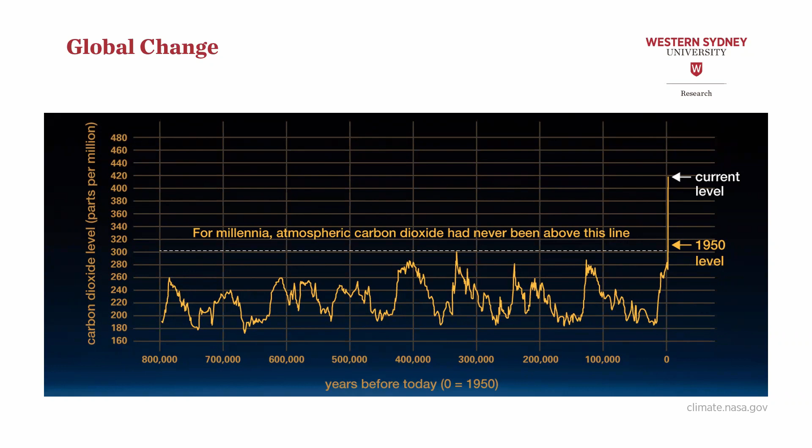Now, when we look at the Earth system itself, this is in acknowledgement of one of our greatest climate advocates in Australia that recently has very sadly died, Professor Will Steffen from Canberra. He was an absolute outstanding researcher in the field of climate change, particularly on a global scale.

This is a paper that he published in PNAS in 2018, and it shows you the Earth system pathways that, based on his knowledge and that of his colleagues, they trajected where we're heading. You may have heard the term climate cliff, that we're close to the cliff. Well, this depicts the cliff. You see the glacial or interglacial times in the very back, where you have cooler temperatures, warmer temperatures interchanging, and you travel through time where you have your interglacials that are warmer, then your glacial periods that are cooler, and Earth would have just bounced in this half pipe from one end to the other.

Now, with the start of the Anthropocene, and particularly the last 200, 250 years, we started to see a warming of the planet since the beginning of the Industrial Revolution. With the increasing emissions produced by burning fossil fuels, we are now pushing the Earth system into a warmer state. This warmer state means we're getting to what is indicated here, a planetary threshold.

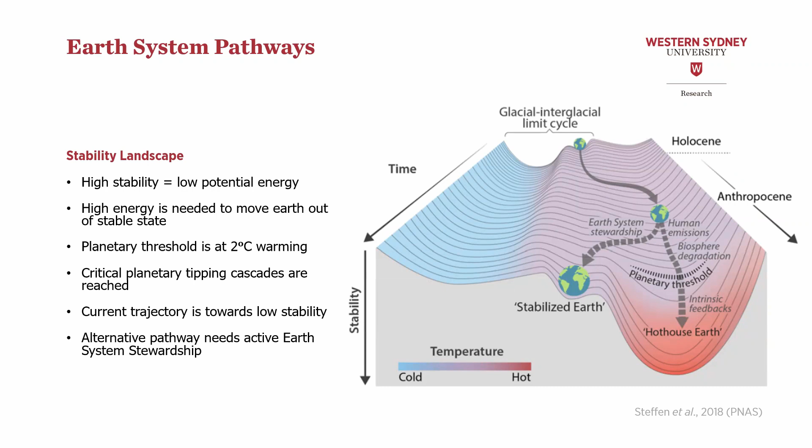Professor Steffen also in this paper talks about tipping cascades, and this is something we need to understand when we talk about planet Earth and where we're heading. Once, like a domino game, once you start tipping one stone, there are chain reactions that are sometimes even accelerating the decline or the speed towards the next tipping point.

This graphic shows you that these tipping points are temperature related. These temperatures that you see here in yellow, 1 to 3 degrees, in orange, 3 to 5, and then above 5 degrees - these are surface temperatures of the planet. So if we have a surface temperature warming here in Australia currently of about 1.5 degrees, we are getting very much into the areas of these yellow tipping points, of these cascades.

We can already see, when you look at Australia in the map, coral reefs were indicated 2018. In 2019 and 2020, we had mass bleaching in the coral reefs - 80% or even more than 80% are currently damaged or dead. The United Nations, or UNESCO, is thinking of changing the World Heritage status of the reef because of that. So there are already signs that these tipping points are reached or even surpassed. We know that this year is the lowest measurement of Arctic ice and also of the Antarctic ice shield. So there are definitely indicators out there that show us the yellow tipping points may have already been reached.

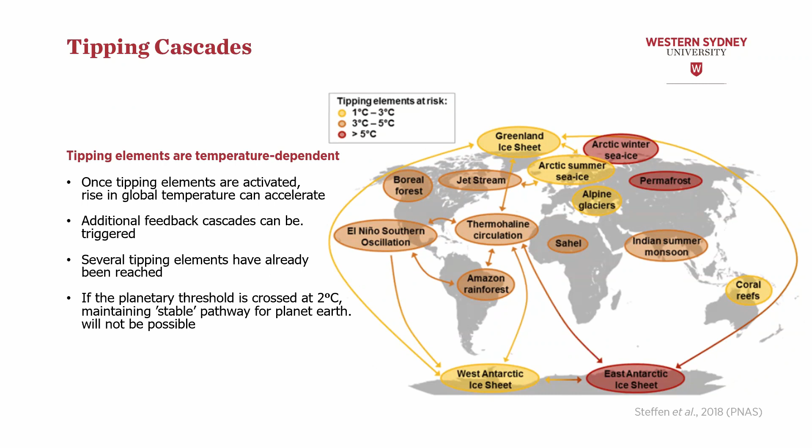You can see with the arrows reaching out to other tipping points, particularly the thermohaline circulation, which is the ocean circulation belt that goes all around the world with cold water, warm water, high salinity, low salinity mixing. There are effects from the melting waters of the Arctic and Antarctic shields that influence how these ocean belts circulate, and therefore the climate that we experience is starting to change. These are global impacts from our activity.

Now let's have a look at Australia and how Australia is doing to counter these very scary effects. Well, the data tells us we're not doing really well in Australia. I won't go through the list.

You can read through the list here, but we are the last of 64 countries for national and international climate policy, and I guess that's also owed to the past 10 years under the previous government, that there was no real progress. Just look at the last point that I list here.

This is from the Earth Overshoot Day. When all Australians would live a lifestyle like we currently do, we would need 4 planet Earths and their resources to actually sustain that kind of lifestyle.

It also means that over time, the graph on your right-hand side shows you the carrying capacity, really, biocapacity of Australia. You can see that the ecological footprint didn't really change over the past 50, 60 years, but our biocapacity has declined in this country. We're depleting the resources that we have available. And that means that our ratio for the biocapacity reserve plus or minus the deficit is getting worse.

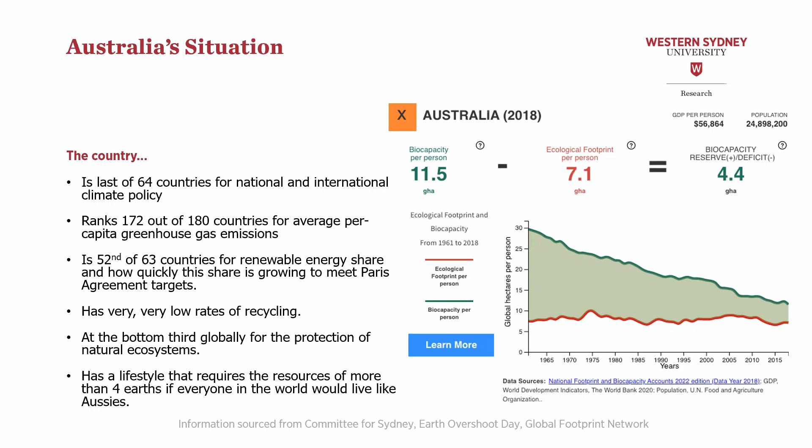When we look at Sydney, scaling further down to Sydney, we can see that Sydney itself as a city is a very high CO2 emitter, and it also does produce relatively small amounts of renewables as well.

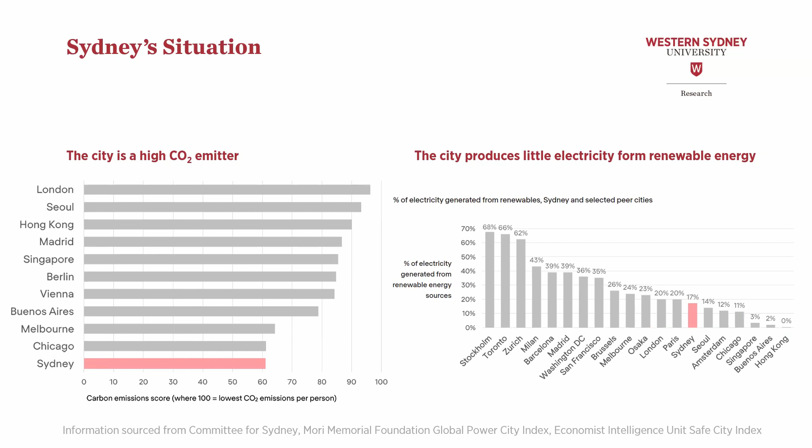Other things that Sydney is not really good at, we know that water recycling, for example, has a very low percentage in the water use across the city. There are other indicators that Sydney itself is not doing really well in this space to contribute positively to global effects from human activity.

Now, as I said at the beginning, I don't want to leave the room depressed, or on your screens to finish this seminar and think that doom and gloom is upon us. We at the university here at Western, we take this very seriously, and we really work for empowering the community.

Part of the mission, it's basically in our constitution for the university, part of the mission of the university is to work in our research for the local communities. We're only one of 2 universities in Australia that have that written into their constitution.

Because of this approach to community and to work with community and for community, we are very good for several years now in working towards the Sustainable Development Goals. Our Vice-Chancellor, Professor Barney Glover, has signed up to the SDGs very early. We were one of the very early universities that signed up to work towards the Sustainable Development Goals of the United Nations.

And last year, as a result of all our collective efforts within teaching, research, within operations of the university, buildings, and so on, we reached the #1 status of 1,406 universities globally that were assessed for their contribution towards the Sustainable Development Goals. We came out as #1. As a relatively young university, this is a fantastic result, which we are really, really proud of.

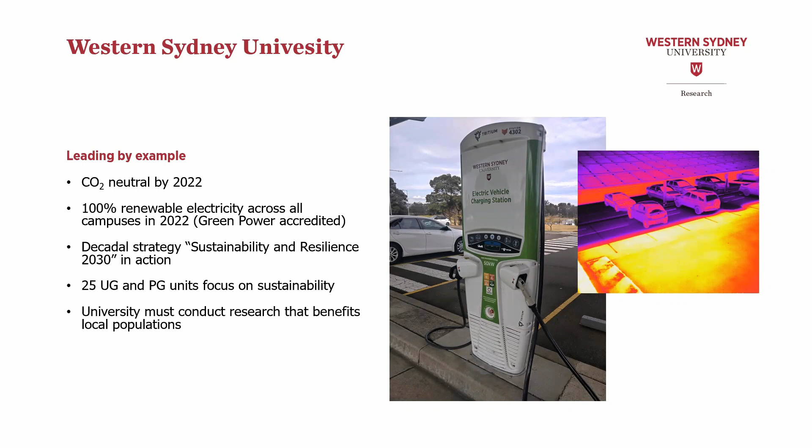Lastly, I want to say that not only do I feel proud being able to work on Darug land and having the permit or the permission to do my work on land that was never ceded, we have recently been awarded nearly $80 million to build the first indigenous center of excellence in Parramatta.

On Parramatta South Campus, which is a fantastic outcome of our new, or relatively new, Deputy Vice Chancellor for Indigenous Leadership. It's one of the first leadership positions in the university administrative system in Australia that absolutely focuses laser sharp on Indigenous support.

We have a lot of additional underlying support for our Indigenous students, including special lectures, the Badanami centers. We have lots of programs for children. The Pathways to Dreaming or the Heartbeat program are only a few examples. So we're really taking it very seriously to be there for the community, and also look at the largest Aboriginal and Torres Strait Islander population here in Western Sydney for all of Australia.

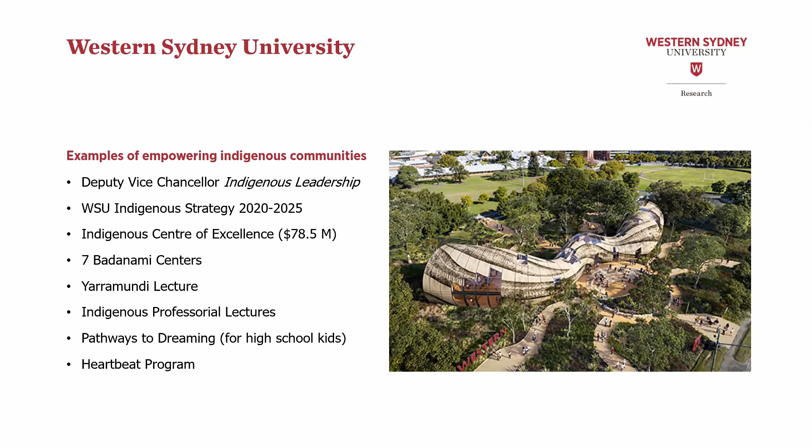This is where most of the Aboriginal people still live today, and we are taking it reasonably, with a high responsibility to help these people achieve greater learning outcomes and therefore have greater prospects for their work life.

Now let's get to cities. Why are they overheating? The IPCC, in their latest report released in 2021, for the first time created a separate section for urban areas. That was the first recognition of the importance of cities to climate change effects on a larger scale. As stated in their regional fact sheet for cities, urbanization has exacerbated changes in temperature extremes in cities, particularly for nighttime extremes. We can see that in Western Sydney, where we sometimes have nighttime temperatures above 30, even above 35 degrees, which is very, very stressful on the human body. The urban heat island effect is further amplified in cities that lack vegetation and water bodies. So these two impacts really summarize why our cities are overheating.

To further picture what it means for cities and development, there's a very nice graphic in this fact sheet where you can see that geometry, human activities, and heat retaining properties are highlighted as elements in cities that contribute to warming. The statement at the end says cities are lacking blue and green infrastructure, which is of course our cooling infrastructure. This image shows that water and vegetation are the only elements that can cool at a whole-of-city or metropolitan scale.

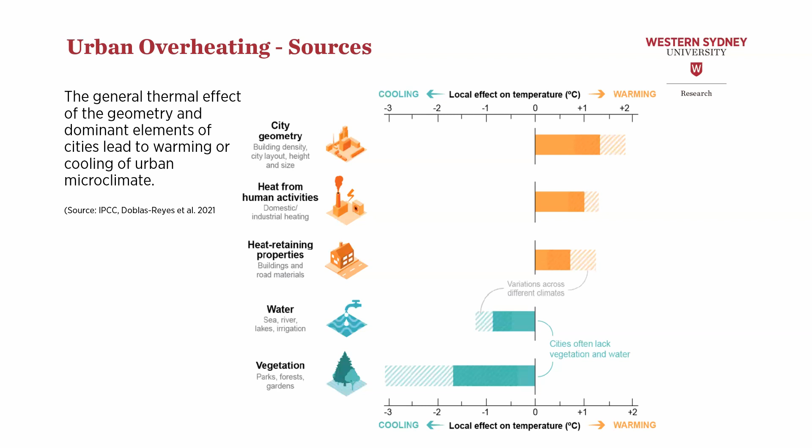I want to highlight urban heat and with it the urban heat island effect. This is an example of Paris. What you see in these images is Paris from the sky, satellite imagery. We're looking at a day in summer in 3-hour increments, starting at 1 to 4 o'clock in the night, going from top left to top right, then starting in the second row. You can see that the first two graphs in the top row are still during the night, showing a very pronounced urban heat island effect. The urban core of Paris is much, much warmer than the surrounding, mostly vegetated area. There's quite a bit of forest around Paris as well.

As the sun goes up, looking at the very right, 9 to 12, and then bottom left, 12 to 3 o'clock in the afternoon, it becomes very heterogeneous. So the urban heat island effect starts to wash out because of the different thermal properties of materials within the city throughout the landscape, which means heat is not only staying in the city but can also be quite warm around the city. When you have, for example, a field that was just recently plowed, with bare earth exposed to direct sunshine, it becomes really warm.

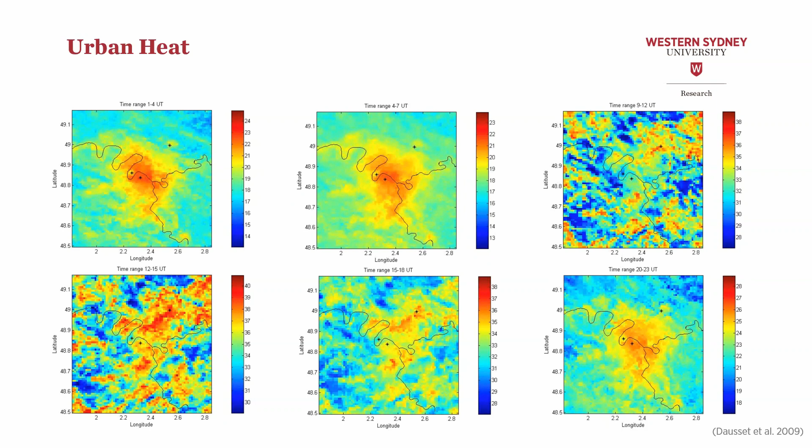So surface temperatures can also rise in the surrounding area. But when you look at the scale on the right side of each graph, during the night it runs from 14 to 24 degrees, or 13 to 23 in the very early morning hours. In the afternoon, bottom left, it's from 30 to 40 degrees. So we're seeing much greater heat loads, but more distributed in a heterogeneous way. Lots of people think the urban heat island effect just happens all the time, but it's most pronounced during the night, and that's why it's so important that the IPCC has stated that hot nights are on the increase, with very high expectancy for more hot nights. This is where the urban heat island effect kicks in and causes us a lot of problems related to public health.

When we think about what happens in cities, I think this image explains it very clearly, because what we do is change land use from vegetated open surfaces to closed surfaces, anything from streets to driveways, walkways, houses, that lead to heat. Simple as that. The problem is that we're changing the thermal capacity of a landscape.

On the right, you see vegetation cover compared to a master planned community in Western Sydney. The vegetation not only transpires and therefore provides air cooling, it also has a relatively low thermal mass. That means it exchanges heat very quickly, and because it transpires and has water available, it stays cool. Surface temperatures are much, much lower.

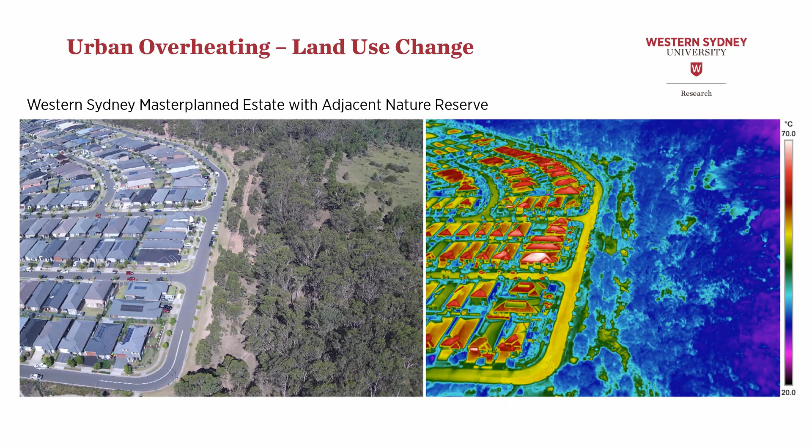Once you start introducing hard materials from roads to buildings, you can see how surface temperatures increase tremendously. And that, of course, warms the air, which means not only is your house warm, but also your neighborhood is warm. And that's where, at this scale, we need to start thinking of how can we reduce this warming or even eliminate it completely.

One of the really big culprits in my work that I find time and time again are unshaded car parks, covered by bitumen without any shade. As you can see here, this is the new Sydney Zoo near the Lighthorse interchange at Eastern Creek. It is a micro-urban heat island in itself. My measurements show that the nighttime temperatures around this car park are higher compared to the nearby Eastern Creek nature areas, which has effects on ecological food chains, on habitat quality, and so on.

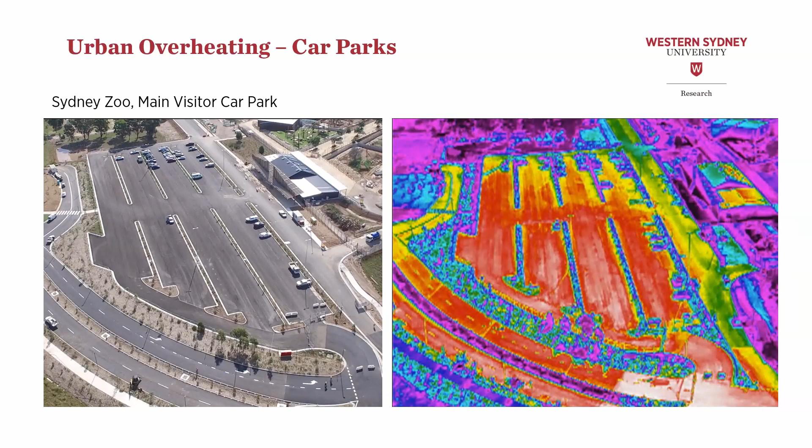This is a continuous problem we see across all of Western Sydney, where we found about 6 square kilometers of unshaded black car parks. Think about how many football stadiums without anything else that is just black, soaking up the energy from the sun and re-radiating that into the night.

I won't go too deep here, but just as an indicator for what really happens physically with those kinds of surfaces, and the same would apply to streets and buildings, you're dealing with incoming shortwave and longwave radiation that gets absorbed by surfaces and gets stored. It depends on whether you're looking at these energy equations during the day or during the night. Energy has to go somewhere.

In the case of those hard surfaces, the energy from the sun is transferred into energy you can feel, the sensible heat flux. So if you walk over a hard surface that had a lot of sun exposure during the day, you will feel radiant heat coming off that makes you feel warmer. You can feel that on your skin. This is basically captured in this diagram that shows the heat fluxes and energy fluxes that lead to warming the atmosphere above those surfaces.

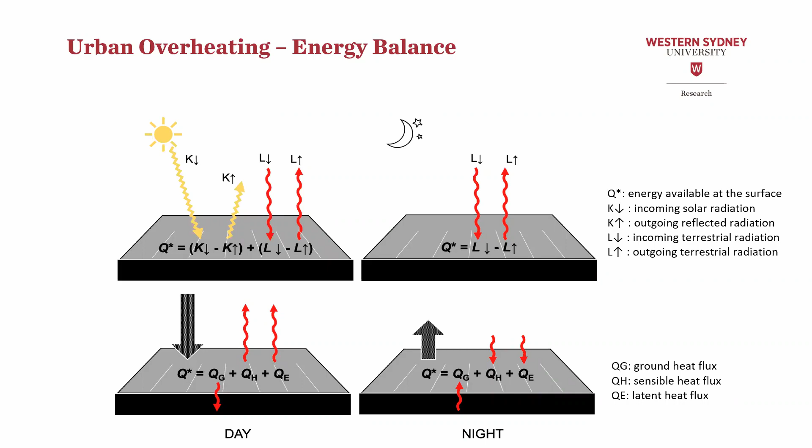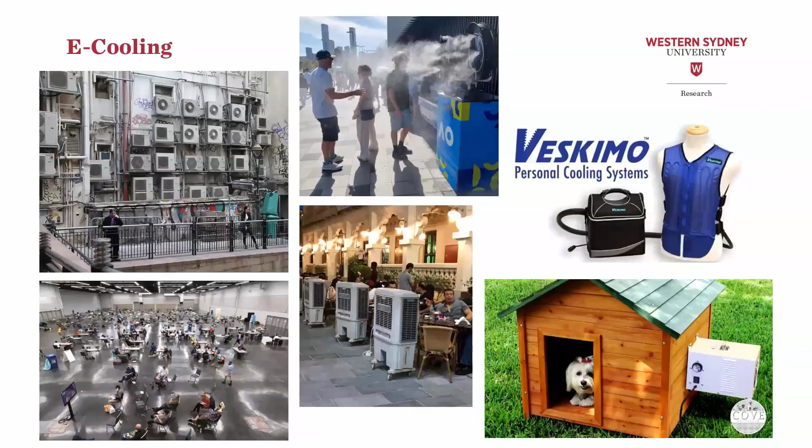So now, how can we change these heat characteristics of materials, of places? Of course, we can do what I call e-cooling, electricity. Just use electricity to cool things down. We can cool indoor spaces. There are lots of applications, and we saw it recently in these tremendous super heat dome effects in North America and southern Canada.

Suddenly cooling centers were popping up everywhere because people were not equipped at home with air conditioning. You can see in the top left a building retrofitted with air conditioning system after air conditioning system. This is what's happening at the moment in Southeast Asia too, which of course has a lot of climate implications in the long run.

At the bottom left, you can see one of those cooling centers, and we trialed one in Blacktown so far. But if we ever experience similar conditions to those in North America and southern Canada, we don't have this kind of infrastructure in Sydney. So what do we do? Where do the people go that don't have air conditioning at home? Or what happens when we have blackouts because the electricity grid is at capacity and pushed beyond because everyone switches their air conditioning systems on?

There are solutions. This was a recent picture given to me by a friend who visited the Australian Open, where you had misting apparatuses where people can actually get cooled in the summer heat.

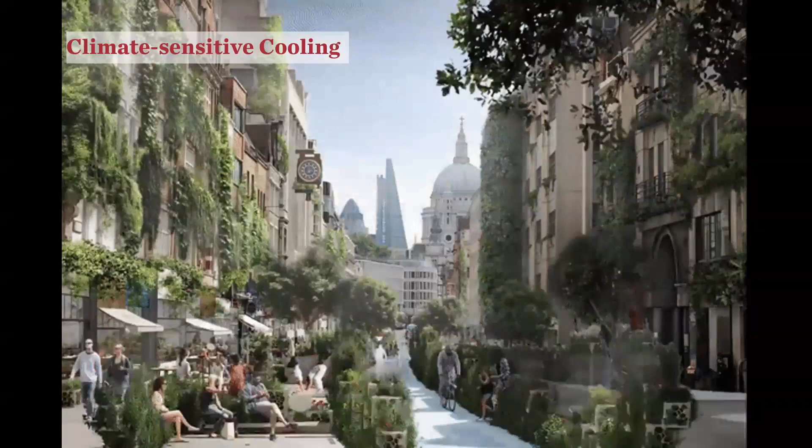This is much more what we want. We want climate sensitive cooling. You can see in this little animation, it's green facades, it's pocket parks, it's taking away streets, or even if you leave streets there for active transport, you put some cool paving out so that you have reflective surfaces that stay cooler. There are lots of things we can do. Of course, this is wishful thinking because it doesn't happen as quick as we see here, but I think it's much more reasonable to approach our cities in a way where we take climate sensitivity into account and try to use green infrastructure and blue infrastructure to cool them down.

Well, if we want to have green infrastructure, then we have a problem because, as signified here on the left-hand side, trees grow slow. If we plant trees today, they probably give us some kind of cooling in 20 years that is meaningful, but we will have hot summers in between. What do we do? Also, the graph on the left-hand side shows you that trees, even if you plant the same species, will grow differently in different places. So in some places, they may grow slower than in others. We find places in Sydney where we can't even grow trees because you have all the underground services or you have the overhead power lines.

How do you grow a tree there with meaningful canopy over time? And then this is on the right-hand side in that graph. Then we have a problem about over-promising and under-delivering when we get to tree cooling. When we empirically measure how much tree canopy cover gives us how much cooling, we can see in the bottom two lines that we get maybe 0.1 degree per 10% canopy increase, maybe up to 1/4 of a degree for 10% canopy increase. By the way, Sydney is aiming for 40% canopy cover. So there are limits, and we can't just promise, hey, we make the city green and then everything is cool.

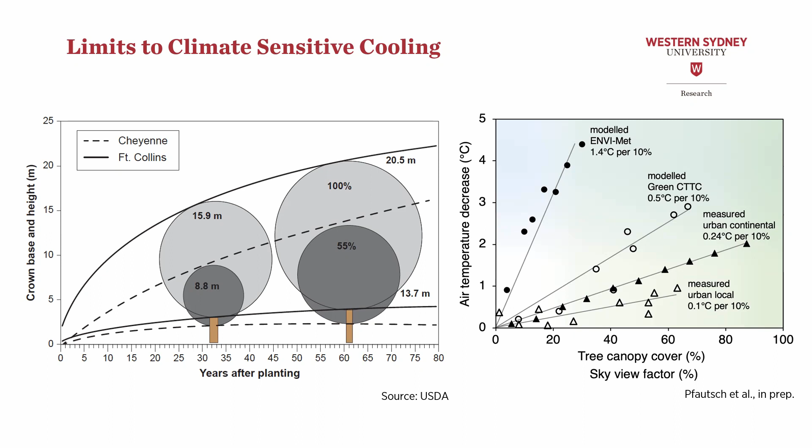That's not the case. When we use models, there's this problem of over-promising depending on the input parameters into your models, where you can see if we use ENVI-Met, a widely used urban climate model, you get 1.4 degrees per 10% increase in canopy cover. Very unrealistic. We've never ever measured that in the real world. So there are problems when people start to use ENVI-Met and set up policies around what we want to achieve and say, hey, we get 3-degree cooling by increasing canopy cover by 20%. Let's do that. We doubt that this will actually happen.

What we do instead is we provide alternatives. This is part of the research I'm doing here in Western Sydney and also in Eastern Sydney, where we look at other alternatives and provide recommendations from playgrounds to schools to light rail transport. A few of those reports are out there. Feel free to take them with you to see how we are communicating our research.

We always put actions, recommendations, cheat sheets or crib sheets in there. So if you're a busy policymaker or a director of a program, you don't need to read the 60-page report. Go to the crib sheet or the cheat sheet at the beginning, get the key points, and then inform your co-workers about the really important changes that need to start happening. We're trying to bypass these long processes by going out, doing the empirical research, and then providing these recommendations that are realistic and can be implemented.

This was in one of the reports, a very interesting image about roof color. Probably a few of you out there in the Zoom world have heard me talking about black roofs and how much I despise them because they're really, really unnecessary. Now, this image shows you why I do this. You can see the black roofs in the foreground on the left have the hottest surface temperatures. Once you look further back into this little street block, there are some beige and white colored roofs. They are about half of the temperature, which also means the surface heat from those roofs will not radiate into your house, will not increase your air conditioning needs.

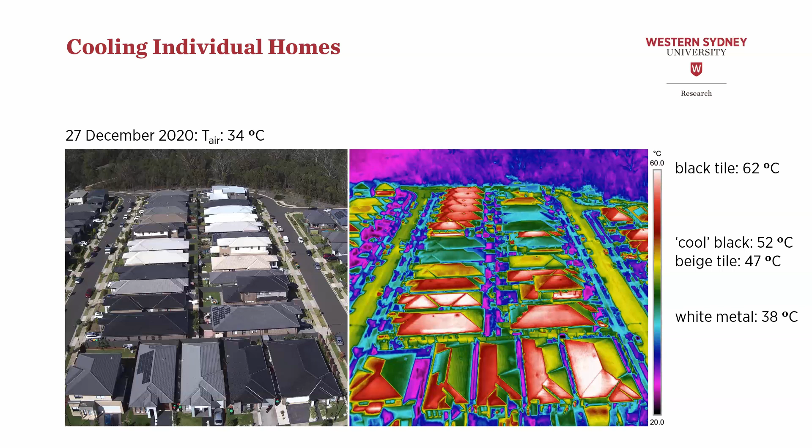If you build a home, you need a roof anyway, so why not put a beige one on? In some councils, you're not even allowed to do that. For example, the Northern Beaches wants your building to blend into the bushland character of the council, so you're not allowed to have a beige roof. To me that makes very little sense. From a design and aesthetics perspective, maybe it makes sense, and that's probably where the decision came from. But when we want to achieve citywide cooling and reduce heat across our city, we need to get into these kinds of design applications that we can change.

Here's another one, a similar situation in a master plan community. You can see the original view and then the infrared view. I want to point out this building, second from the right, has AstroTurf, synthetic turf, in the front garden, replacing the natural turf. You can see how much hotter it is—it gets into the reds and even whites, about 60 to 65 degrees, while the air temperature was 25 degrees where I was. Very, very hot material. It makes no sense, because as you can see in the image, the highest heat load of that material is right at the house, meaning the front of the house gets nice and warm just because of this material.

You can also see that driveways painted in different shades of gray and even black have much higher temperatures than the one on the very left, which was left natural in this very light concrete color. It's very fashionable, and I don't understand why—it probably matches the black roof nicely. It's fashionable to paint your driveway in dark colors, but that increases the heat load in front of your home. You can also see that the selection of garage door color again brings heat into your house or keeps heat outside. These are simple design choices when you assemble your new home.

You can just say, hey, I want a white colored garage door. It doesn't cost you anything more or less than the brown one, but it will cost you less in electricity use for air conditioning in summer.

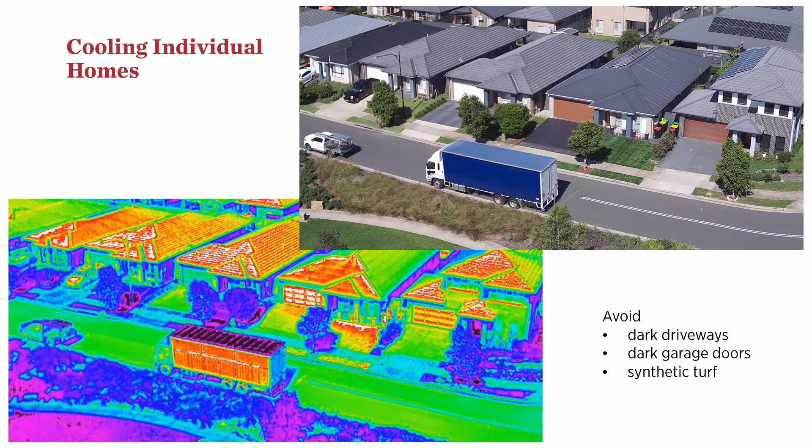We also went to playgrounds. By the way, how am I doing with time? Thirty-five? That's good. Yep.

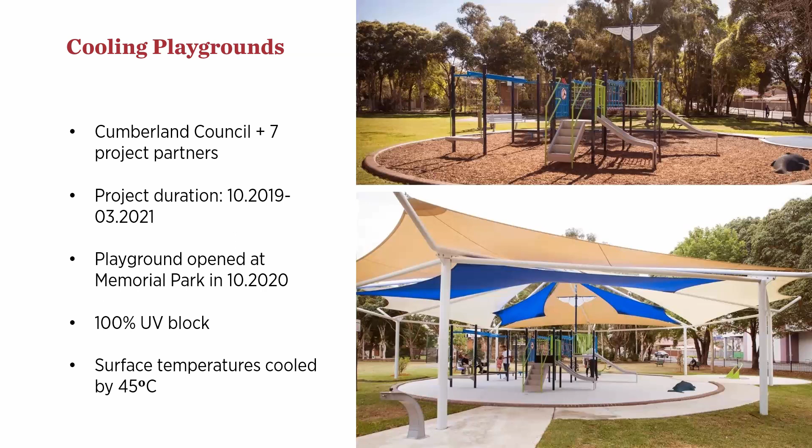It was a very successful project. I was there not too long ago, around Christmas, and we did some filming there. It was packed all the time - people love it, they absolutely took it on. I talked to people there, and they remember how it was before, when over the Christmas, New Year's break and into the school holidays, they couldn't go there during the day because it was just too hot. Now they're having a new playground that they can actually use.

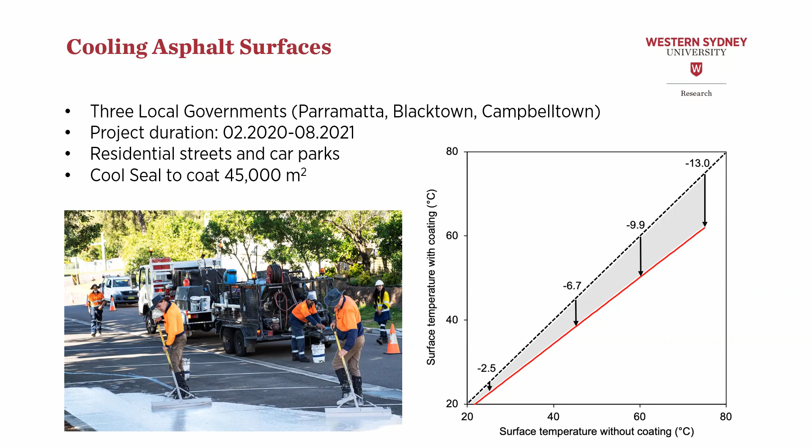That's what we're currently doing at Bicentennial Park - changing the whole park into a natural air conditioning system, where we provide the coolest possible conditions inside the park and around it by changing the irrigation system from human operations into AI. The AI is helping us condition the entire park - about 200 different zones - to have optimal hydration status, meaning all plants can transpire freely at maximum rates when it's hot, instead of shutting down and preserving water. That means we get the highest air cooling out of the park.

It's a very nice project, and we're really proud of what we're achieving here. It will run a few more months, and then hopefully for the next 5 years, Sydney Olympic Park Authority, together with some subcontractors, will continue operating the system. So it's embedded into the urban fabric for the people of Sydney Olympic Park to enjoy. You can go online right now and check where the coolest and hottest spots are in the park - all that data is live streaming. It's a very exciting project.

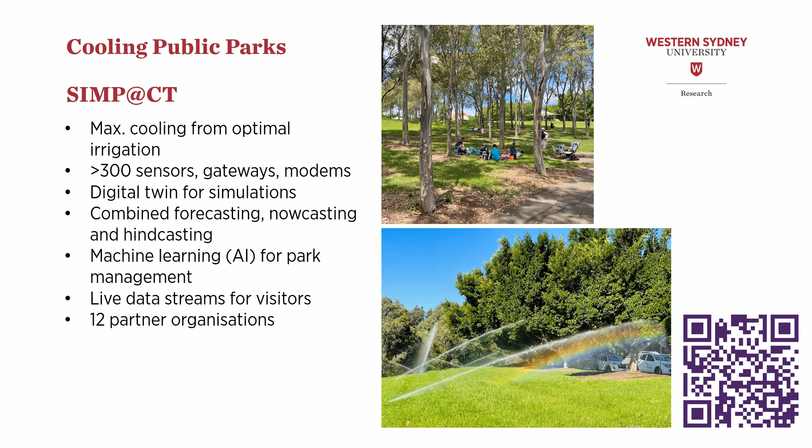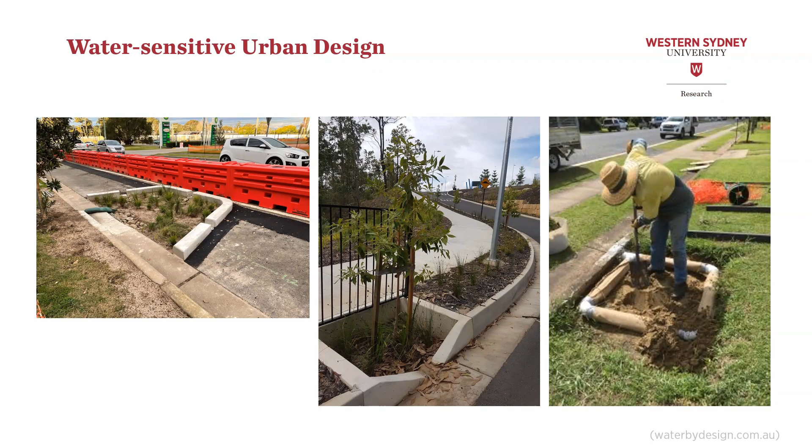That helps particularly with newly planted trees, where often local governments don't have the capacity to run around with a water tanker putting water out all the time. Here you can actually rely on stormwater infiltration.

I want to acknowledge that my colleagues are doing really great work too - it's not just me, there are quite a few people out there. This is happening at a global scale - there are reports from the World Bank and the United Nations Environment Program, as well as documents from colleagues in universities. UNSW is very strong here in Sydney, and very good work is also done by the Western Sydney Regional Organization of Councils. They're doing groundbreaking work in urban cooling and how we can get to cooler suburbs.

So what can we do today? I'll run through this quickly. I come back to Paris, because I showed you the urban heat island map for Paris. Paris has done something that is absolutely mind-boggling.

It's probably the largest urban cooling system in the world. Currently, they have about 90 kilometers of underground pipes where they use water from the Seine for heat exchange, taking up heat from air that's pushed through the system. The warmed water is put back into the Seine. This saves many hundreds of thousands of tons of CO2 emissions because they don't need to run air conditioning systems. Just think of a picture of Paris.

There are lots and lots of heritage buildings. You can't put air conditioning on these buildings like I showed you from Southeast Asia. It's just illegal, you can't do it. Also the structure may not actually carry the air conditioning system, so they needed to come up with something else. In the early 90s they started to develop this system and are now expanding it. By 2040 they want to have more than 1,000 buildings cooled by this system.

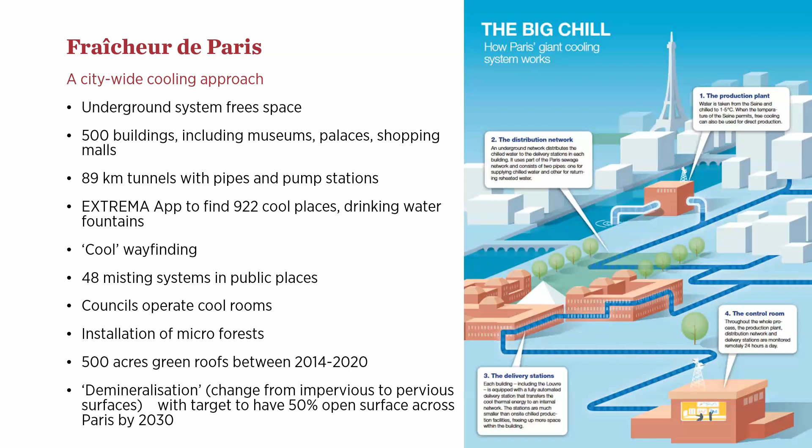Interestingly, the city of Sydney also joined Resilient Cities, a global program by the Rockefeller Foundation. Sydney does great work in this space, but Paris has gone much further since joining this global program. There are cool rooms everywhere. They have increased the coverage of green roofs, and the programs around demineralization are really interesting, where they rip up impervious surface and put back pervious surface for rainwater to be absorbed, which helps hydrate plants and reduce stormwater runoff. So they're doing a lot - there are some really great things happening in Paris.

We have examples here from Germany of how you can build a cool suburb. That's 20 years ago - triple glazing and solar was compulsory there. That's 20 years ago. When you want your home approved and use BASIX to get DA approval from council, you still get away with single glazing here in Sydney today. It makes no sense, it absolutely makes no sense. And the cost from single to double glazing is not that big.

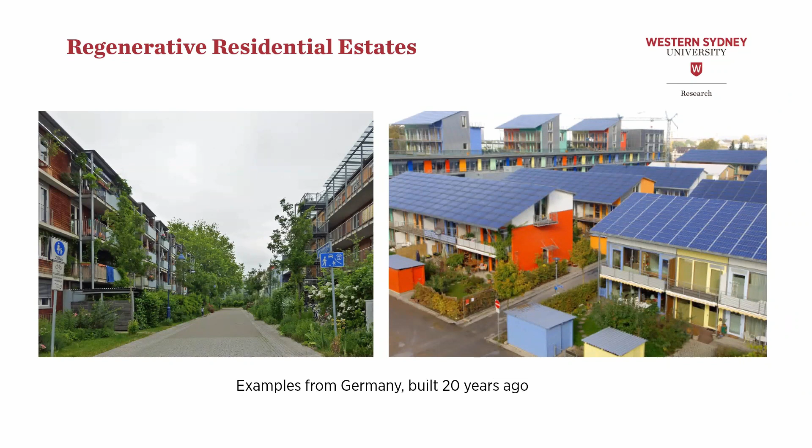We try. This is Fairwater in Blacktown, one of the settlements I learned about, where some very interesting concepts were implemented and trialed. Frasers Property developed this settlement for more than 1,000 residents. They are hooked up to a geothermal cooling system, so they're not using electricity for air cooling as we would normally do with a reverse-cycle aircon.

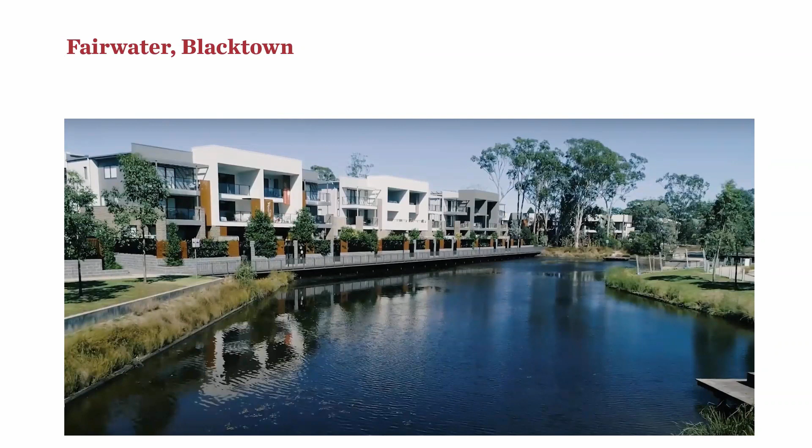They have parklands - you can see that mature trees were incorporated into the landscaping. They created new wetlands, combining blue and green infrastructure. They say 80% of the people living there are now more happy and satisfied with how they live than where they lived before. So it has an impact on the quality of life of the people there. There's community, people are outdoors, it seems to be a very nice place. It's a good example of where in Sydney we actually do something well.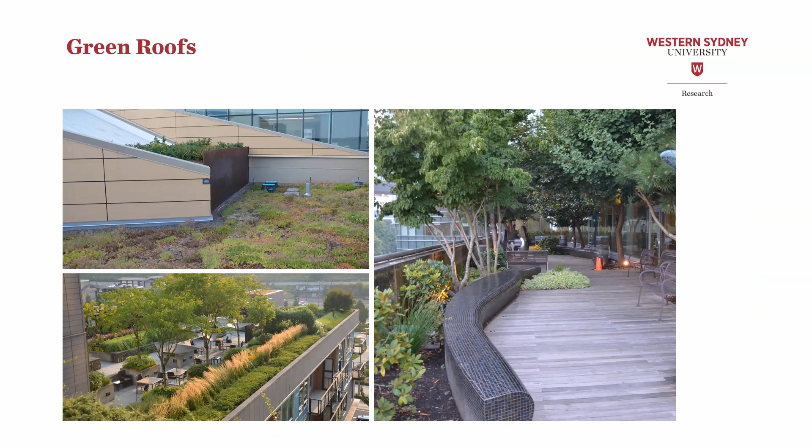We could do better with rooftops. There are extensive and intensive rooftop gardens, some great solutions where you can add additional green space into the city without ripping up surface at the ground. You just take greening up - it also helps biodiversity. If you're going onto skyscrapers, you don't have insects up there anymore, but if you're working at multi-story apartment buildings, there are some great studies that look at beetles, birds, all sorts of things. You also create space for urban agriculture. So there are lots of opportunities for rooftop gardens we can develop.

Why don't we build more like this in our city? I don't know any example like this from Sydney. It's very sad. And of course, green car parks. And I don't mean these green car parks, I mean these green car parks.

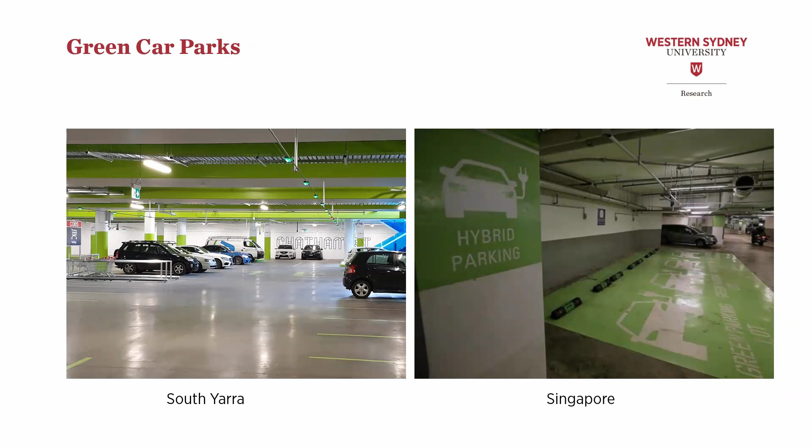Green car parks are a huge opportunity. We know that in Western Sydney alone, there are at least 6 square kilometers of unshaded car parks. In some places we may not be able to put trees in, but for example at Bungarribee in the Western Sydney parklands, they used locally sourced sandstone, crushed it up, and used that as an open surface material to cover parking bays where you don't have a lot of steering, wheel action, and acceleration. It's fine, the material is still there after many years. It's not that you lose it because it wasn't concrete or asphalt.

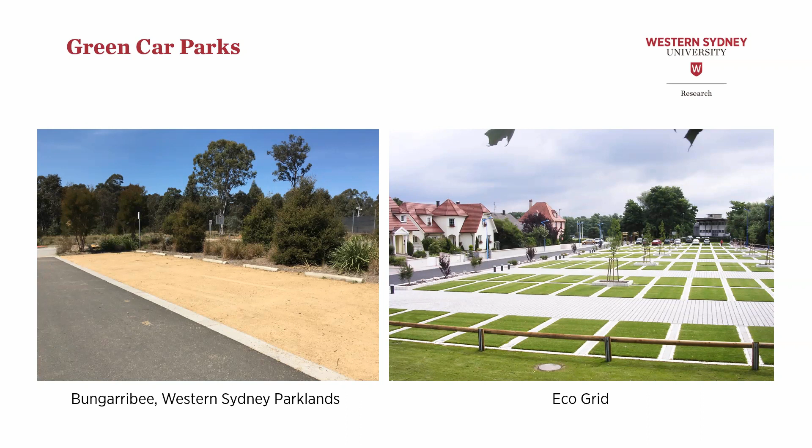There are other products available, like EcoGrid, a plastic grid that distributes the load from your vehicle but leaves space where you can grow grass. It becomes a green surface you can drive on without damaging the grass. It works, the car park is in use. We have similar installations at Sydney Olympic Park, but they're only for overflow car parks, not for the ones where you have most of the traffic coming in.

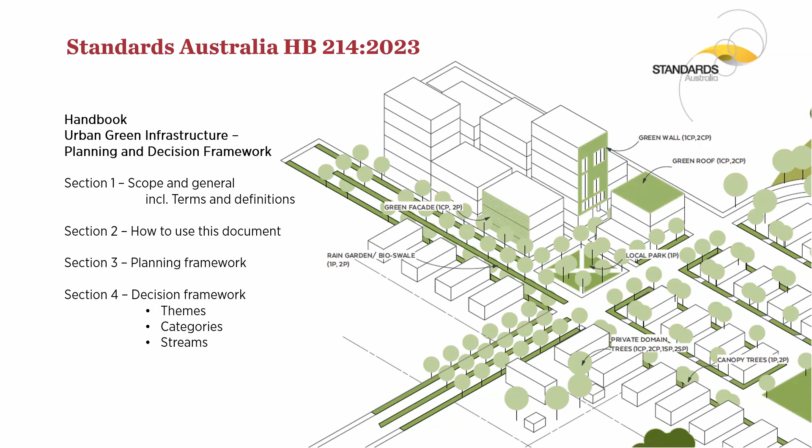We also developed, available now for everyone, a handbook together with Standards Australia, industry partners, landscape architects, and researchers like myself. It took us about 3 years. It was published in January, and provides planning and decision-making frameworks for how you integrate green infrastructure into cities, whether in greenfield developments or densification projects, public or private, large or small scale. It's out there for everyone in Australia to use, and it has a glossary so we can talk about the same elements when discussing greening in the city. It's a resource we're developing to push in the right direction.

In summary, anyone out there, please accept the scientific findings and start acting on them. It's heartbreaking to see that such simple things as replacing black roofs with beige roofs still face so much resistance within various communities, be it developers or politicians. It's heartbreaking because it means we're not progressing towards urban cooling.

I have shown in this presentation that urban cooling is achievable, and how blue and green infrastructure should really be integrated because it gives us the greatest cooling benefits. Be everywhere means work at playgrounds, schools, car parks, streets, anywhere. Cooling needs to happen everywhere and anywhere.

I say embrace density and retain open space. Stop building flat and wide like we do now. Build up, and the space you're saving, do not cover it with more hard infrastructure. Leave it open for parklands so people can enjoy it and have a quality of life when they live in these higher apartment blocks or even skyscrapers.

Demineralize, that's a fantastic term. Take it away and put it into your workplace. Rip up hard surfaces and replace them with open surfaces wherever you can, it makes a huge difference. If we have water seeping into the ground, particularly in new developments where we're just covering it, called capping, we're soil capping large areas that generate so much runoff, which causes lots of problems downstream in our waterways.

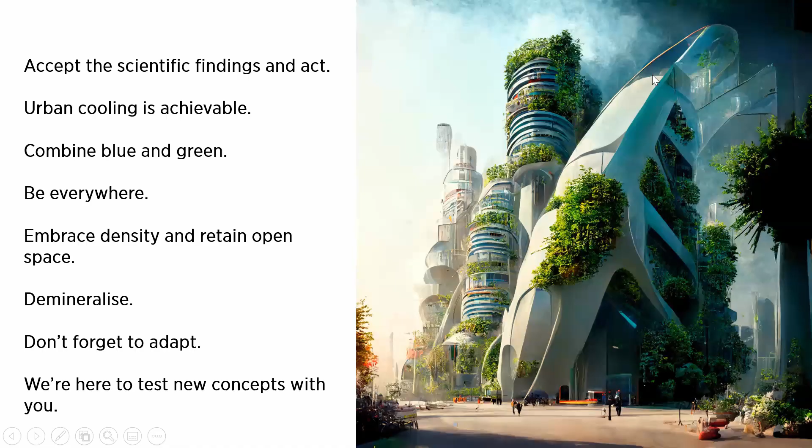And of course, we're here to work with you once you remember to not just reduce and mitigate, but also adapt. We're happy to test those mechanisms with you. I can't do this work by myself.

I leave you with a last image before I'm happy to take questions and comments. If you're interested in learning more about urban cooling, there will be, in about a few weeks, a new course on OpenLearning, Western Sydney University's online learning platform, called The Basics of Urban Cooling, where I explain more about urban cooling and how to plan for cooler cities. Thank you, and I hope you enjoyed the talk.